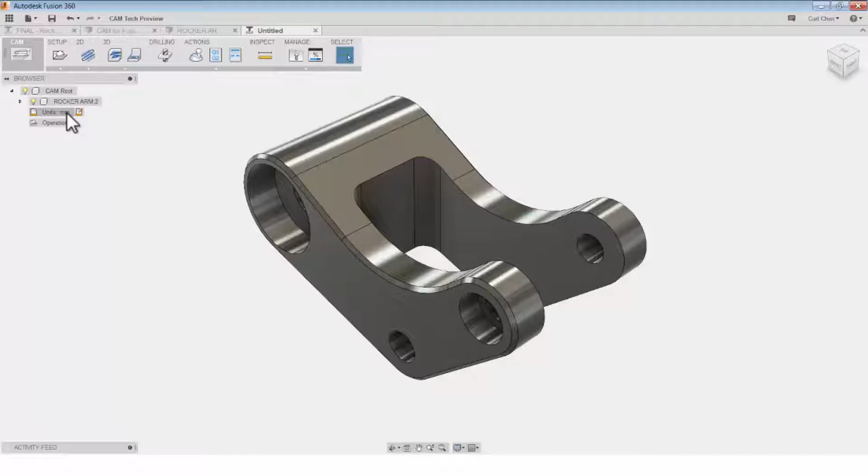To change the units, on the far left hand corner of the browser where it says units, you can click on the little paper and pencil icon and change the active units, and we'll go to inches.

Now let's go back up to the setup, and we're going to go under stock, and designate the size of the stock we're going to start machining with. So what this means is that if I use fixed size box, it's saying I'm going to pick a piece of aluminum off the shelf that's 2 inches by 2 inches by 4 inches, something along that way.

But if I want to designate, hey, take my part and add material to the outside, and that will be the size of my stock, I'm going to drop under relative size box. Now I can key in 0.15 adding material on the side, 0.255 on the top, and 0.255 on the bottom.

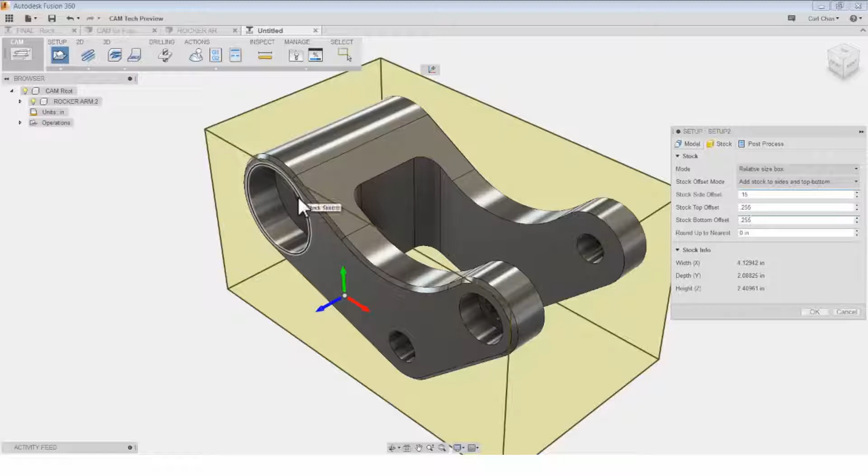Now what we want to do is designate where we want the work coordinate system, which is the triad right here, and we want it on the top far corner. I want to show you, as I showed in the example with the part in the fixture, how we're going to have that orientated. The part's going to be facing upward, just like this, and I can use my view cube at the very far right hand corner, but I want the work coordinate system positioned in the far upper right hand corner here in relationship.

Under model, what I'm going to do is activate stock point, and that's going to show me all these points, and I can click the back corner just like that if I want it machined that way. So it's going to start at that corner as a reference to everything else. I'm going to go ahead and say OK now.

So now I've set up the job, designating the size of the stock, and if I click on my browser folder, I can click on the name of the folder twice, and it'll activate the name, and I can rename it, say, main setup, to keep things organized, and then move forward from there. So first things first, I'm always going to face the part.

To face the part, we're going to come over here to 2D setup, 2D toolpaths, come down under face, and now I'm going to come over here to tool. What I did is this is a preview of the Windows library.

With this I can dig through, and I'm going to go look for a 2-inch face mill. If I dig under the tutorial section, you'll see I have a 2-inch face mill that I can select and work with. If I click on it, right click and say edit, you can see all the specific parameters for the face mill.

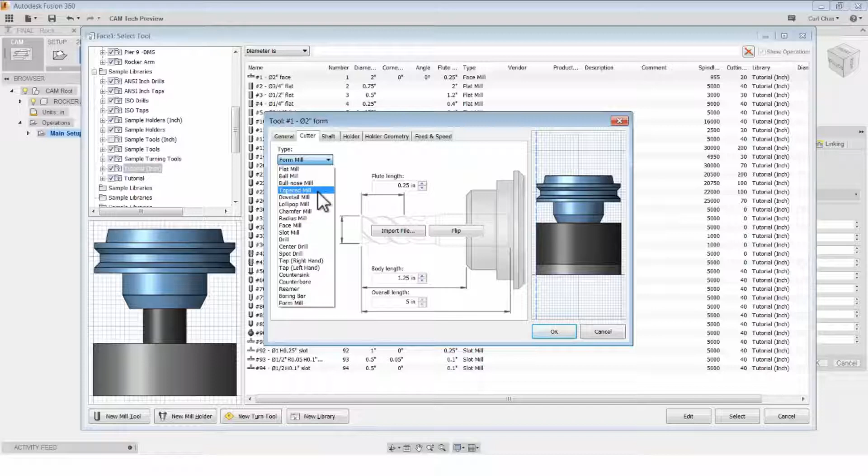So something to keep in mind if I want to make changes, I can even change anything right here and dig through, as well as create my own custom one with a form mill. So some things to keep in mind of how customizable our libraries are for the Windows side, which will be implemented on the Mac side as well in upcoming releases.

I'm going to hop back over to the face mill. One thing I want to point out is you can create custom libraries. So if I want to always work with these specific parts or tools all the time...

If I come over here to my libraries, right click, say new library, I can now create my own library, which I did earlier, and I have tools that I copied and pasted into this library, so I can always go back to them.

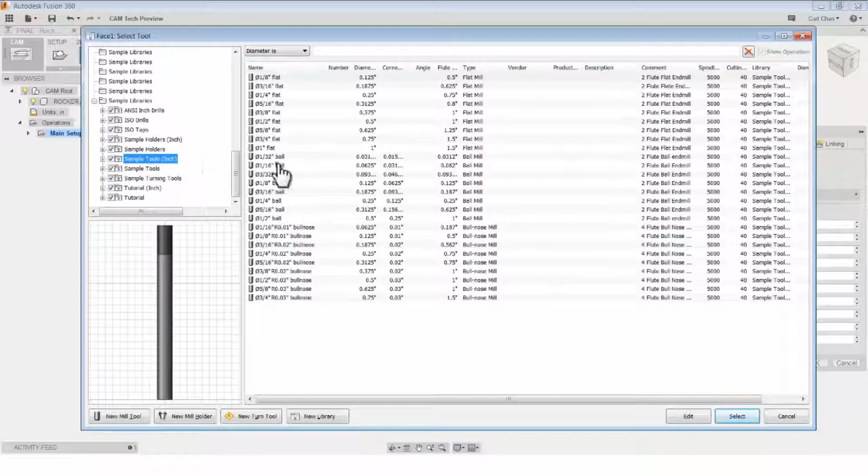Instead of digging through and going to tutorial and trying to remember where that specific one is, I can just right click on a tool, copy, come over here to a library I just created, right click, and paste it right in there to work with. Just a tip and trick to think about when working with your library.

So what I'm going to do is go ahead and face the part, select face, say select, and say okay, and it's going to go ahead and automatically face the part. That's the beauty about Fusion 360: when you work with the face mill, it automatically knows the height of the stock as well as the top of the face, and it will go ahead and machine that.

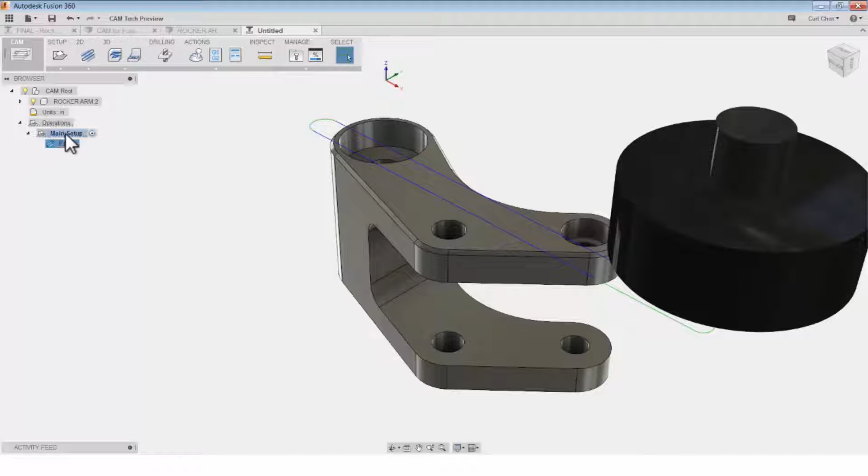If I want to make sure I'm doing this correctly, I can go ahead and show a stock simulation to make sure it's machining that top face. So if I right click on the main setup and come down here to simulate, I can now say let me turn on the stock, make it transparent, and come down here to the very bottom middle and say start the simulation.

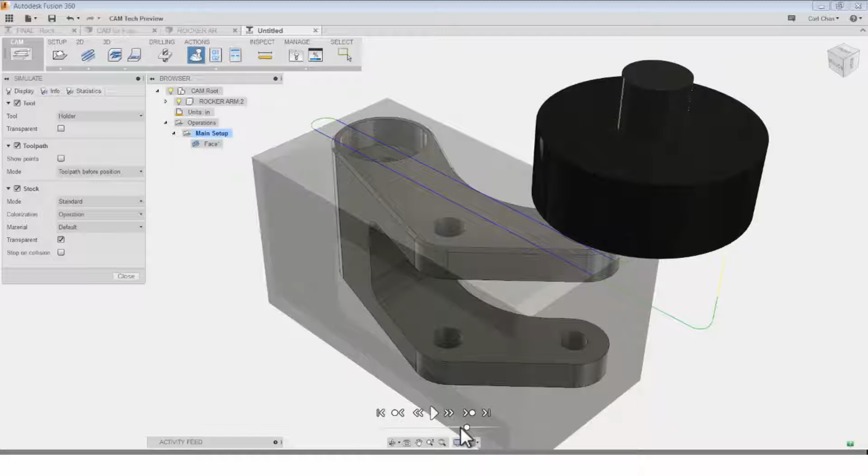You can see right there that it's machining the top face, just like that. And there we go, it shows me a preview of the toolpath. Close that out, now I can continue forward.

So the next step I want to do is probably rough out the outside of this part. Because if you look at how it's set up in my stock, in my vise here, I have that remainder amount of material that I'm going to flip over and then face the back side, but I want to get that outside curvature right there.

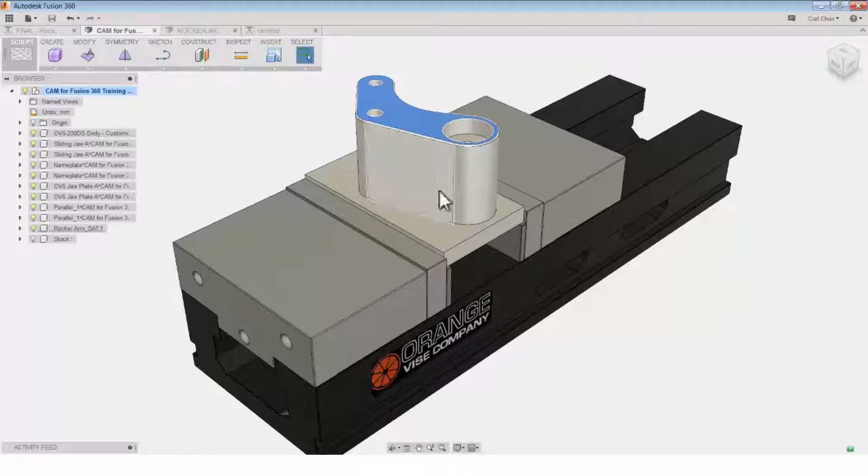So what I'm going to do is introduce you now to 2D adaptive clearing, great for roughing strategies. Come on over, activate that. I'm going to come back over here to my tool library, and I can go through and search under tutorial, pick. I'm going to do a flat end mill.

I have it already set up in my custom library. I'm going to go and grab that guy. One thing to keep in mind too is the flute lengths, and depending on how thick the stock is, that depends on the type of flute length you want to work with, as well as the length of the actual tool.

You can see here the parameters that I have. I have a diameter of 1/2 inch, which can rough that part out very quickly, as well as just a longer flute length, just to dive right deep in and remove that material.

So I'm going to accept that. Now I need to pick geometry. I'll go to the geometry tab, and it asks what I want to machine. If I pick the outside edge, since that's what I want to machine, everything outside that edge, it shows me a preview. The blue shows me exactly the size of the stock, and I'm machining all that stuff that's in blue.

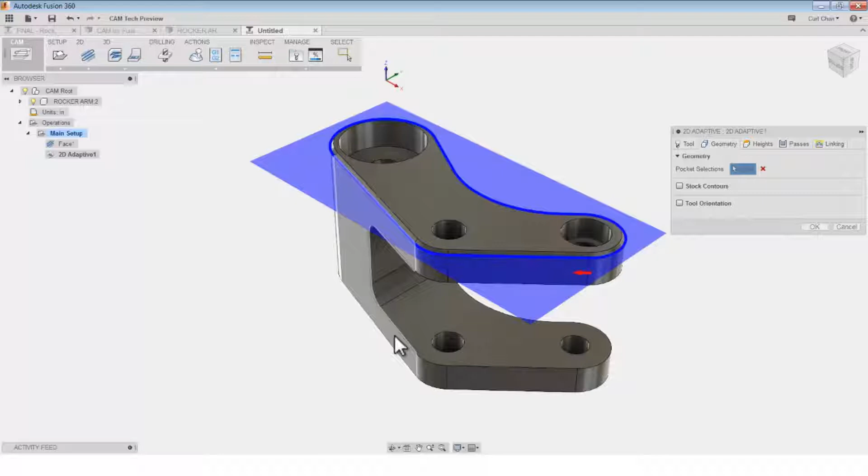But notice where the position is, it's at the very top of the part. I need to machine to the very bottom of the part as well. So I'll come over here to the heights tab, go down to the bottom section, and say let me go from the model bottom, meaning machine all the way down to the model bottom.

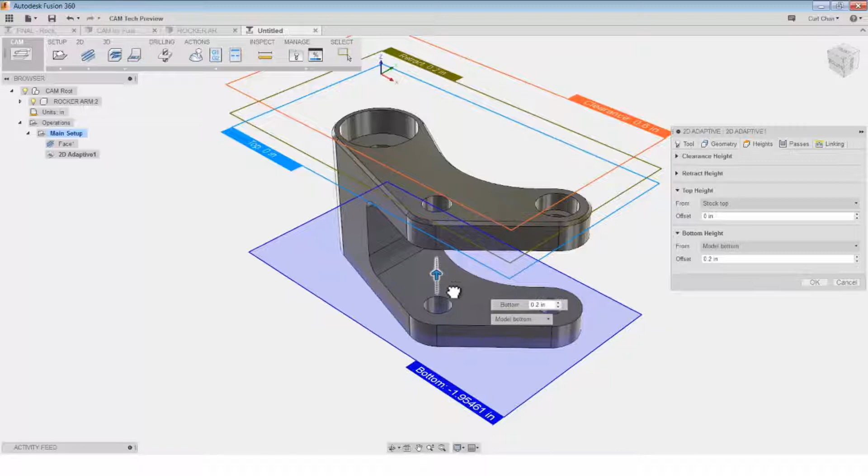If I zoom out, you can see it's going directly down to the model bottom, but my best rule of thumb is to go a little bit past the model bottom, because I'm going to face the back side. So I can grab the plane and drag it, depending on how I want it positioned. I'll have it go down maybe two tenths of an inch below the model bottom.

From here I can say accept, and we'll go ahead and preview that. It's going to generate the toolpath just like that.

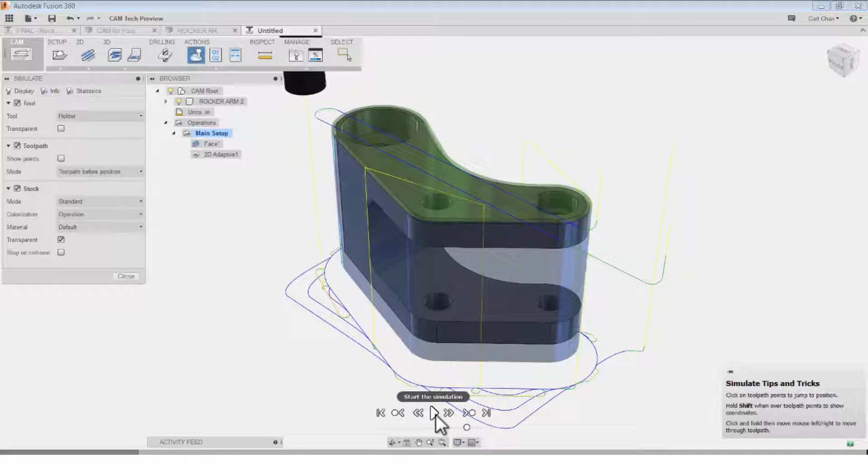If I right click on the main setup, come down to simulate, I can say let me preview this, play. First it faces the part, I'll speed it up, and then comes over and roughs that out, just like that.

Really simple. So the next step is I want to add a finishing pass on the outside. How do I know I need to add a finishing pass? Let me show you a little tip here.

If I right click on the 2D adaptive and say edit, go over to the passes tab, you'll notice that by default stock to leave is turned on. So I always like to personally do a roughing pass and then come back in and do a finishing pass. But you could always turn that off and do it all in one step. It's all about rule of thumb, best practices, and what you prefer.

So I want to show you how to do a finishing pass after the roughing strategy. I'll cancel out. To do a finishing pass, I like to do a 2D contour. Under the 2D operation drop down, I'll come to 2D contour and activate that.

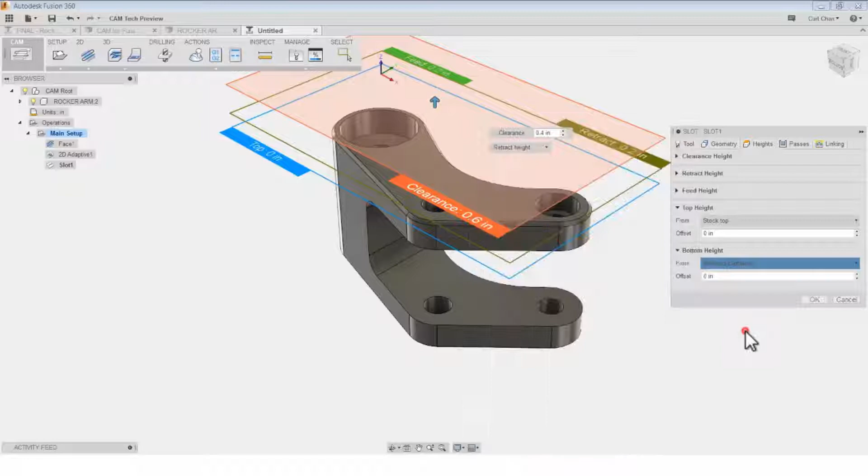From here I'm going to use that same tool, it remembers the same tool I used previously. Under geometry, select this edge, come down to heights. I want to machine to the model bottom, and then go a little bit past it, maybe 0.25. Say okay. Oh, I picked a slot command by mistake.

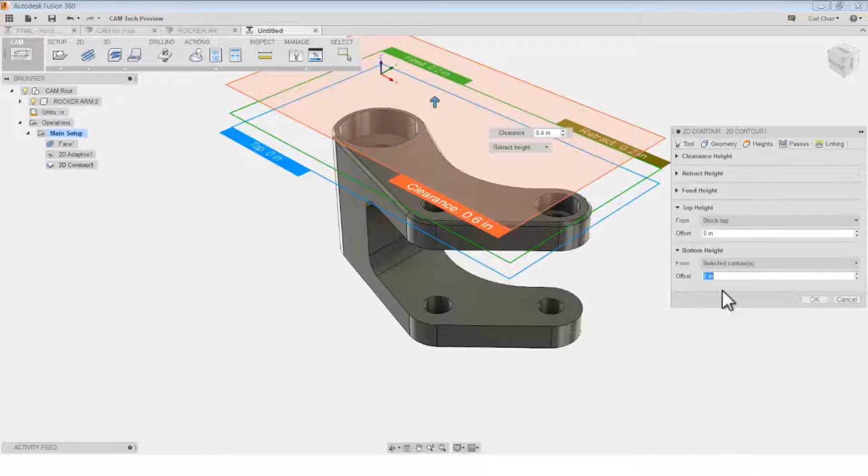My apologies, I'll just delete that and come back here to 2D contour. Got it. Geometry, pick this edge. Under heights, come down to the bottom height and drop down to model bottom, and we'll go a little bit past that, 0.25, just like that. Say okay, and there we go, did a finishing pass.

So we'll show, once again, really easy, simulate and play. Face the part, I'll speed it up, rough it, and then come in and do a finishing pass, just like that. You can see I'm depicting all the different colors for each different operation. For mode, I have standard, and I have colorization set to operation.

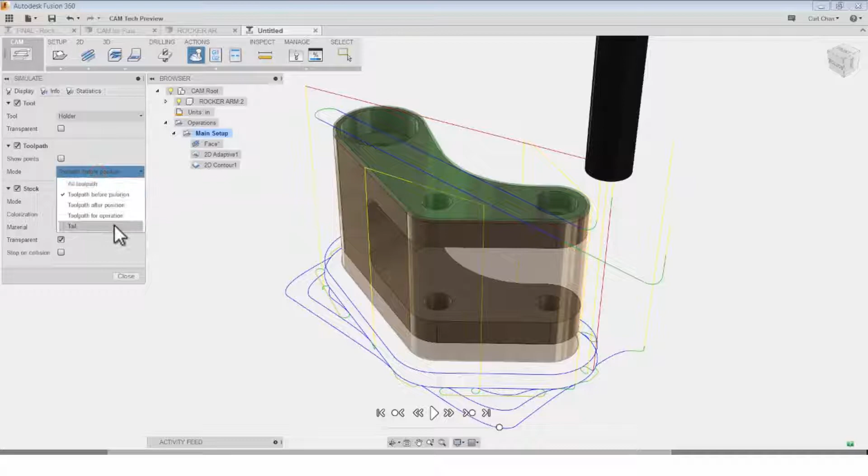Show me each operation as a different color, as well as material set as default, and I can always change it to whatever material I feel like. I also like to set the toolpath under mode to go to tail, because that makes it a little bit cleaner. So if I play from the top, it trails the toolpath as it's going through, showing me exactly what's going on.

Go ahead and close that out. So we're about 80% of the way there. Next thing I'm going to do is add that chamfer to the top edge.

You'll notice that if I come over here to 2D, we don't have a chamfer operation. So we like to keep things clean and simple. A chamfer operation would be done as a 2D contour. So if I physically come here to 2D contour, how do I know where to go to do a chamfer operation? It all begins with the tool you pick.

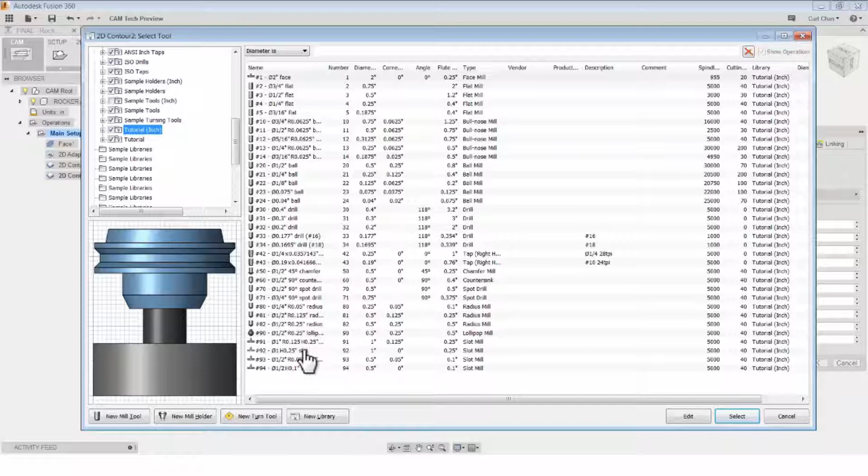If I come back over to tool under select, I can dig through, go to the tutorial, and find a chamfer mill if I want that one specifically, or I can copy and paste and put it into my rocker arm. I'm going to go with a half inch diameter, 45-degree chamfer mill. Go ahead and select that, just like that.

Under geometry, now I'm going to pick this edge, the bottom edge of what I want to be chamfered. Then under passes, you'll notice that since I picked a chamfer mill, it actually turns on the chamfer operation. It's intelligent enough to know that, depending on the tool you pick, it turns operations on or off for you to work with.

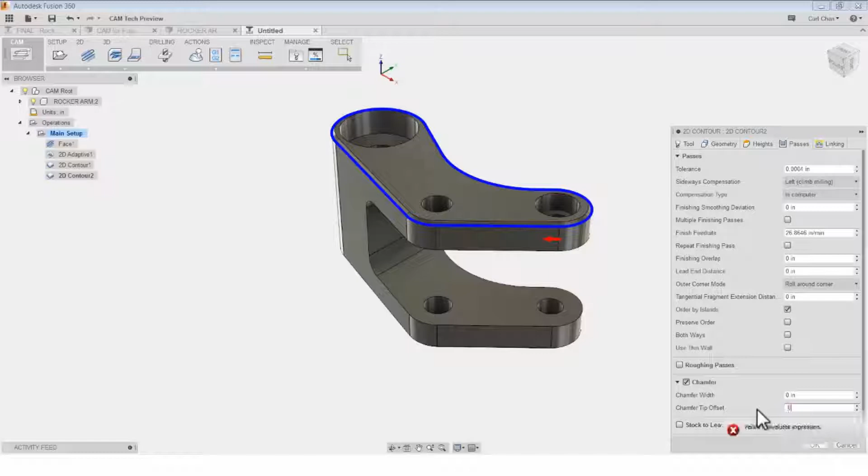Really key there. I always like to do a tip offset, let's do 0.02. Okay, say okay. What this is telling me is I'm now doing a tip offset and I'm not machining with the tip of the tool, because at the center of rotation it's pushing material, not cutting it. So I'm going to move it down about 20 thousandths of an inch, just like that.

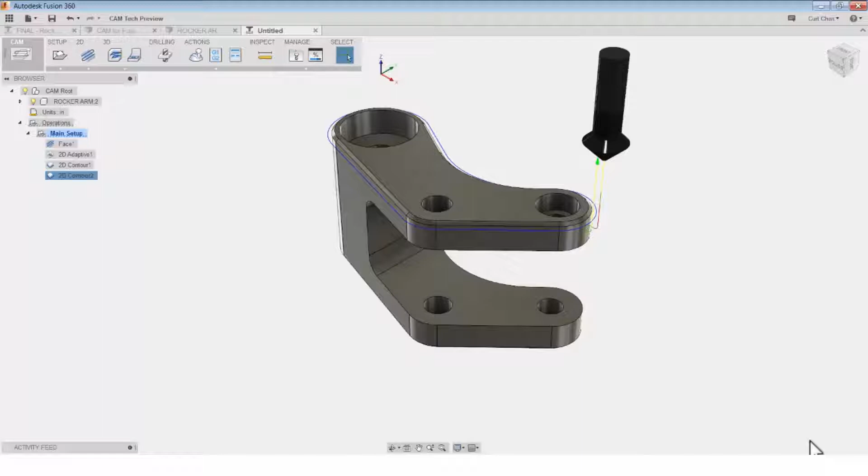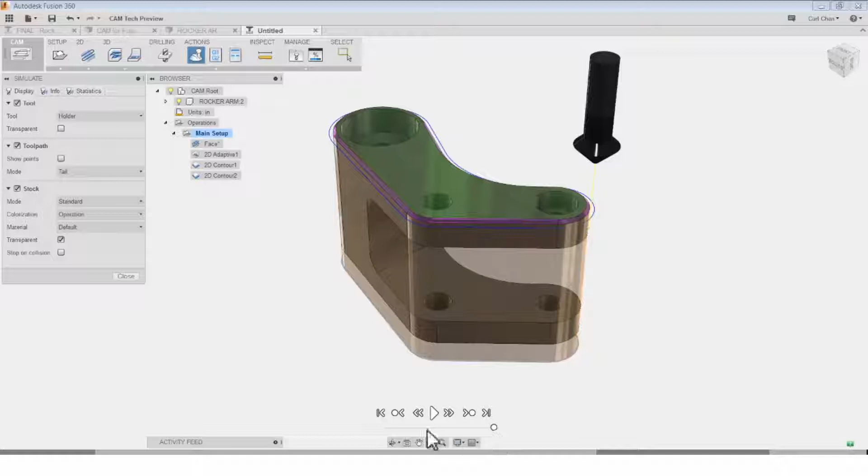From here, go ahead and right click to simulate. I always like to simulate just to make sure everything looks great. Hit play, come right across, face it, rough it, do a finishing pass, and do a chamfer pass right around it, just like that. Now the next step, just two last steps, is I need to bore out these holes.

Go and rotate this around so we can take a look at it. Now to do a bore, come on over and drop down to bore. I'm going to go ahead and pick the tool I want to work with, which I'll just reuse, the same half-inch flat end mill.

Say select. Under geometry, I want to bore out this one and this one first. I'm using a half-inch tool, so it can't actually cut these other holes. We'll go and do that as another operation.

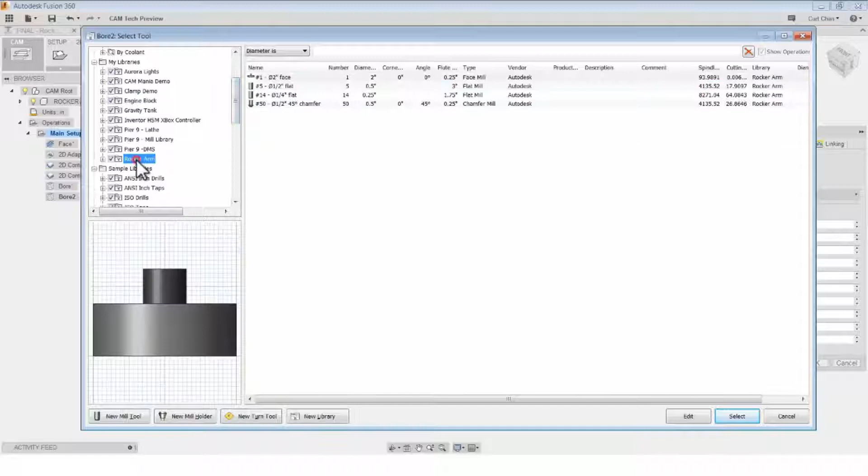Say okay, got that. Come back up, drop down, and do another operation under bore. This time I'm going to pick a smaller end mill. So I am going to go with a 1/4-inch end mill right there.

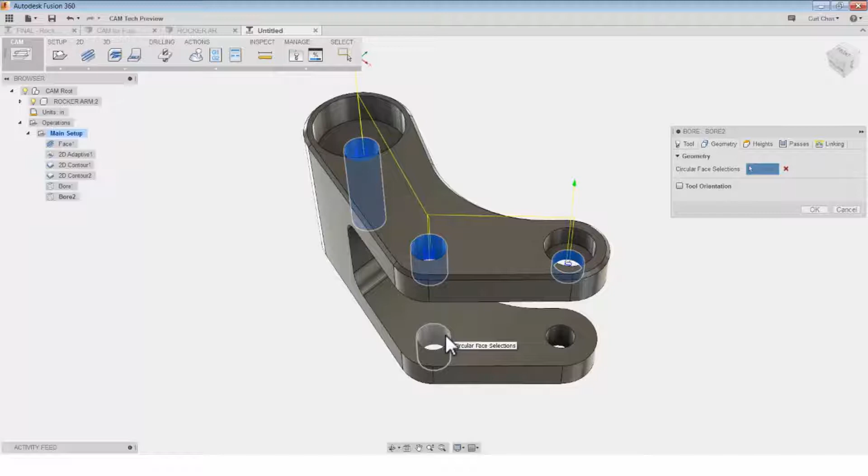Say okay. Under geometry, pick that center, that one, as well as that one. The reason why I'm not picking these bottom ones is because in step number 2, I'm going to flip the part over, clamp it down, then face the backside and drill those other holes. So something to keep in mind - that's why I'm not picking those. Go and say OK. There we go.

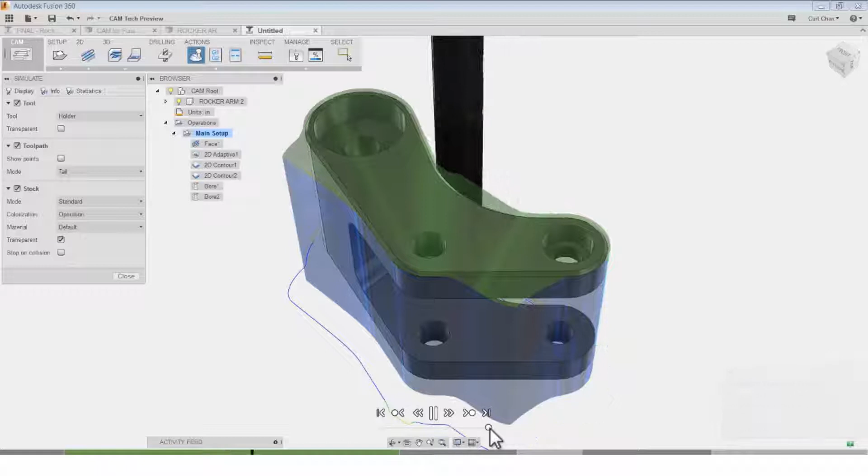Now all I have to do is simulate to make sure everything looks great. Right click, simulate, hit play. Face the part, rough it out, come in, do a finishing pass, chamfer, bore it out, and there we go. Things are looking great, just like that. So that concludes setup number 1 for the introductory to 2D machining.